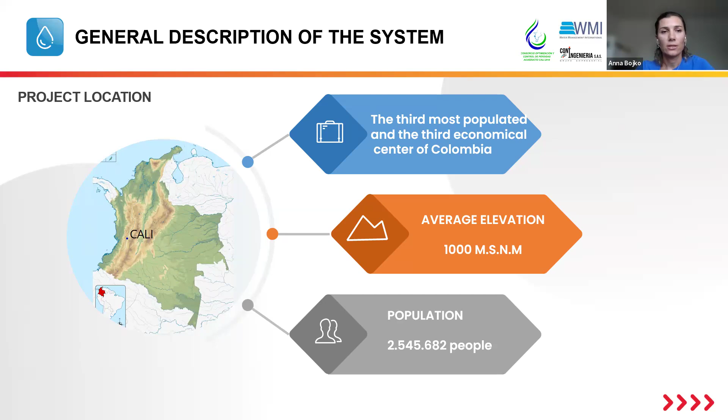The water supply system, as you can imagine for such a big city, is very extensive and very big. You can see here some facts and numbers about the system. It's a little bit more than 3,000 kilometers of network, and it covers 98% of the population of the city of Cali. The main source of water here is from rivers, mainly the river Cauca.

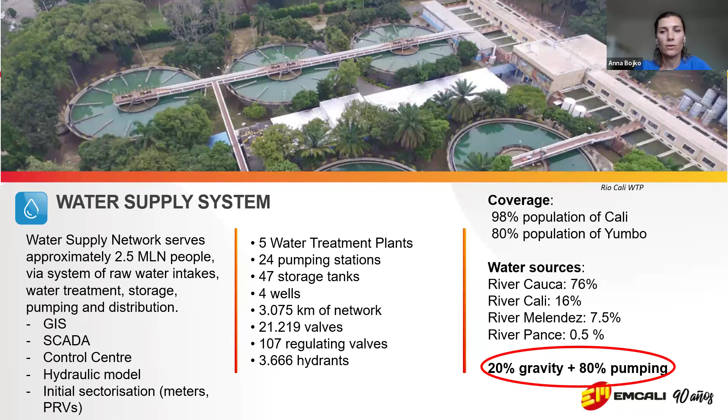What is very important on this slide is that, as the system is quite flat, 80% of it is supplied by direct pumping. This is very important to note when we are talking about physical losses, because when the majority of the system relies on pumping, the losses are quite high initially already.

Just to give you an idea of the utility, they are quite well organized and advanced. They have a good GIS database and SCADA system, and a quite modern, big control center. They do have a hydraulic model, which is updated from time to time but working quite well, and they have already performed initial sectorization.

Just to give you a little background, around 2010 Cali did a very extensive, big project on the initial sectorization of the city. The sectors were defined after extensive study, and some construction works were done to implement this sectorization.

The sectors were delimited, meter chambers installed. But what I always say is that sectorization should be done in several phases, because it's very difficult to do everything at once and right. It requires a lot of time and a lot of money.

So usually what happens is there's an initial phase of sectorization where all data is collected, which is usually not sufficient or very extensive. Then the first study, the initial sectorization, is done and implemented in the field. During this implementation, zero pressure tests, valve tests, and initial measurements reveal a lot of surprises for the utility. So they realize a lot of things and update the GIS database.

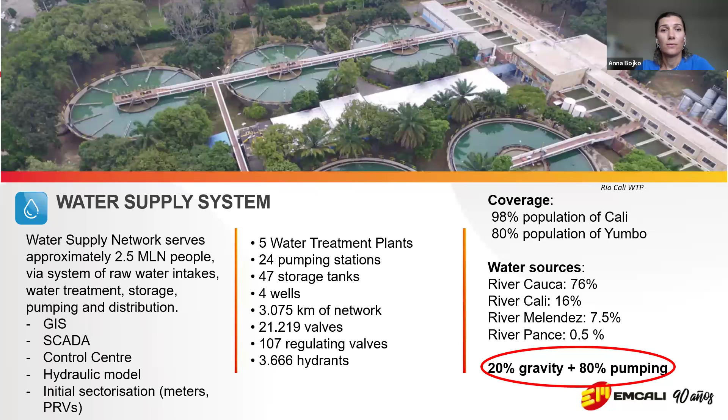So basically, this project was the second phase of sectorization for Cali. There was already some initial sectorization done, but most of the sectors didn't work when we came, and our job was actually to make them work.

So talking about physical water losses before the project, there was a constant trend of increased losses in the utility. Up to 2015, looking at the NRW index in percentage, there was a constant increase rate of more than 2 points per year, which was very, very alarming.

So in 2015, the utility started to feel an urge for some actions. They performed studies and identified various issues at this point, back before the project. They identified that they didn't have any integrated plan for managing losses. The organizational structure was inadequate - there was no unit dedicated to losses, and general low motivation among staff. There were also no widely accepted tools or data to estimate losses, and most of the sectorization was not working, as I mentioned.

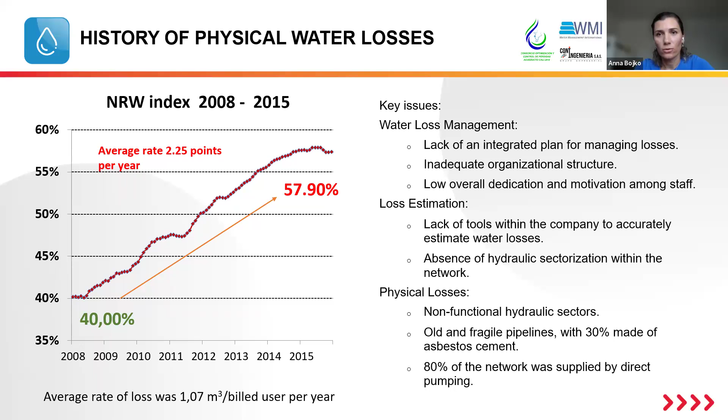Of course, there was also a problem of fragile pipes, with 30% of the network made of asbestos cement, and direct pumping without pressure control at most points.

At that point, the utility was inside this vicious cycle. They were obliged to supply minimum pressure to customers, so they would pump water to comply with this pressure, but that would produce leaks, and leaks would decrease the available pressure. So they would increase the pumping head again to comply with the minimum pressure, and this increased pumping pressure would produce even more leaks. It was a cycle we were trying to get out of.

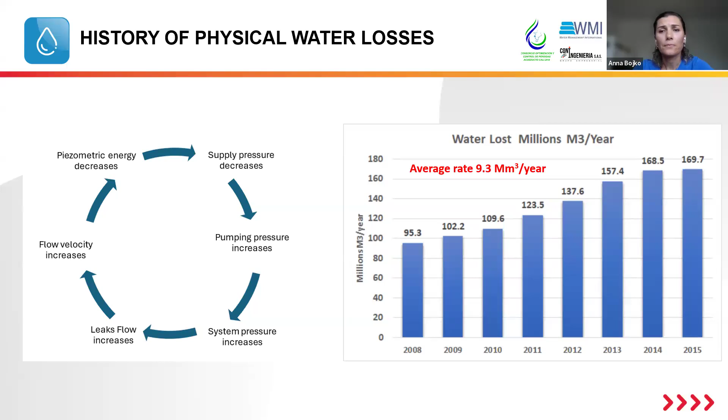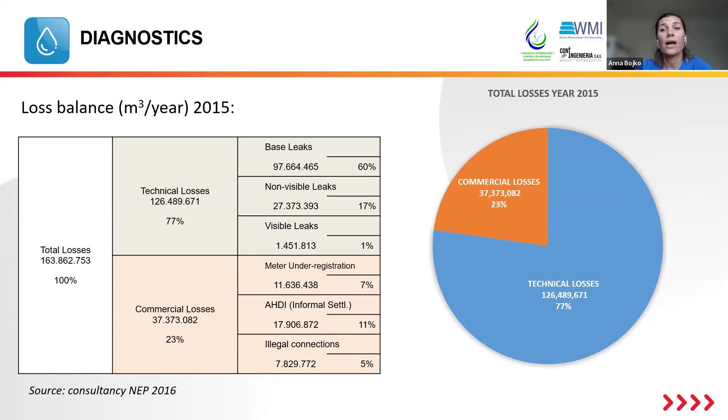In 2016, a very extensive study was performed on the water balance and identification of different sources of non-revenue water. It was found that technical losses contributed 77% of the non-revenue water, while commercial losses were less. This ratio was updated after the project - it's a new study - but the main thing stays that technical losses are very high and a major part of non-revenue water.

In Colombia, there exists an organization called CRA, the Commission for Regulation of Potable Water and Sewer in Colombia. This national Colombian regulator set a target in 2015 that utilities need to achieve 16.3, what's called IPUF, a loss index in cubic meters per billed user per month, by 2021. In Spanish, IPUF is índice de pérdidas por usuario facturado.

This is a national measure of non-revenue water that was actually part of the project. Just to give you a sense in more international units: in 2015, Cali had 788 liters per day per active connection in losses, and the target was to achieve 536 liters per day per active connection by 2021. That's just as a reference.

So that was a target set by the regulator, and Cali had to do something to achieve it. So in 2015, they developed a water loss recovery plan - a very extensive plan covering all areas of water supply. They identified projects and could estimate how much recovery they could expect from addressing different problems.

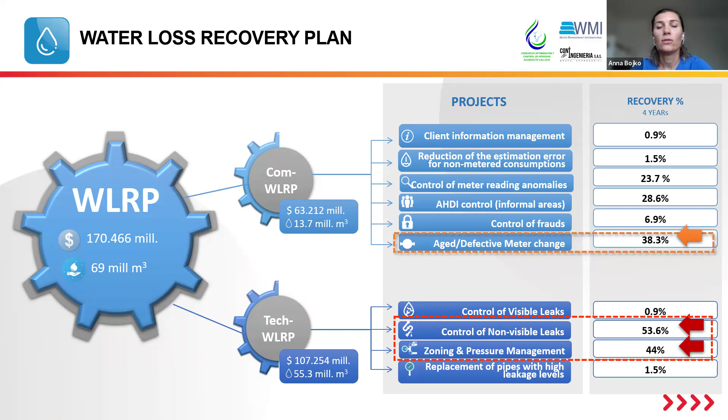As you can see here at the bottom, when we talk about technical or physical losses, the majority of the recovery would come from control of non-visible leaks and zoning pressure management. So actually, this project was designed to address those two issues.

So in 2019, through an international tendering process, Cali contracted a consortium of Water Management International and Ingeniería to implement design and construction works for pressure optimization, sectorization, and non-visible leak control for the city of Cali. Now I will present the details of the project itself and some technical parts.

In the project there were three main flows of work implemented simultaneously in parallel. The first was hydraulic sector optimization and pressure control - sectorization and pressure control across 50 sectors, which is more than half of the city network. This included investigation, DMA tests, measurements, modeling of all sectors, calibration, choosing the optimal alternative for water loss reduction, and finalizing design and construction works.

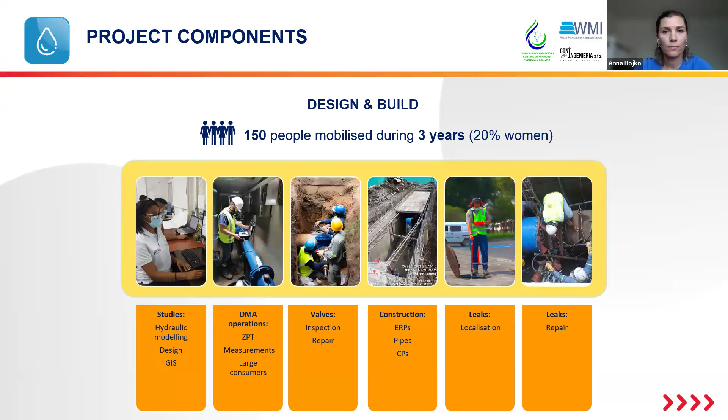We have changed and repaired 2,500 valves, 3 kilometers of pipes, and the client, the utility, asked us to install 4 different active pressure control technologies to do some benchmarking among them. We found that the most challenging part was incorporating some of these technologies into SCADA - this was the most challenging part of the control project.

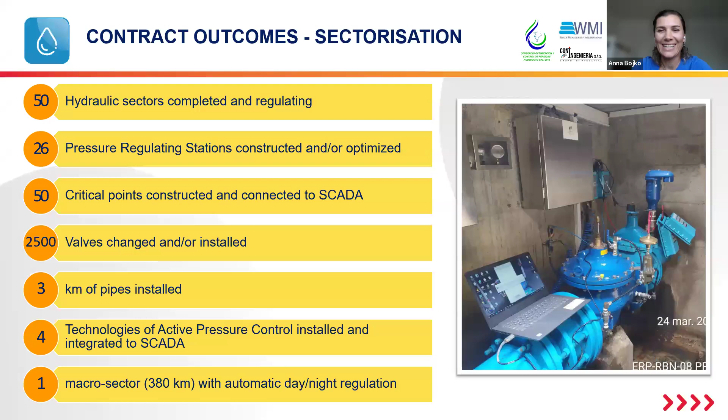Here you can see a very beautiful picture of a very nice pressure and measurement station at the entrance to one of the sectors - very aesthetic, in my opinion. Just to give you an idea about the works we did as part of sectorization and pressure control: construction works, regulation, repair, SCADA, design, and studies.

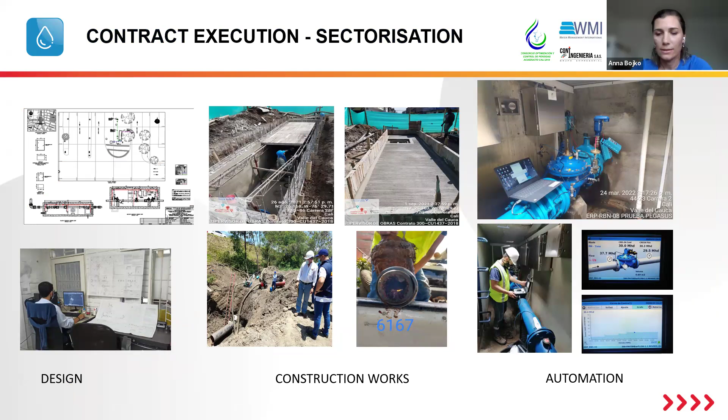We have performed acoustic leak detection and found and repaired 5,300 leaks on the 4,680 kilometers of the network. So basically the entire network below 300 millimeters was worked twice. What's important, and I think it's a very important indicator, is that 95% of leaks were found on the service connection, including saddle. Plus to this, we repaired 35 leaks on large diameters of pipe more than 400 millimeters.

On the next slide, I can show you some of the repairs, some of the leaks that we worked with. You can see big works. Saved a lot of water by repairing those.

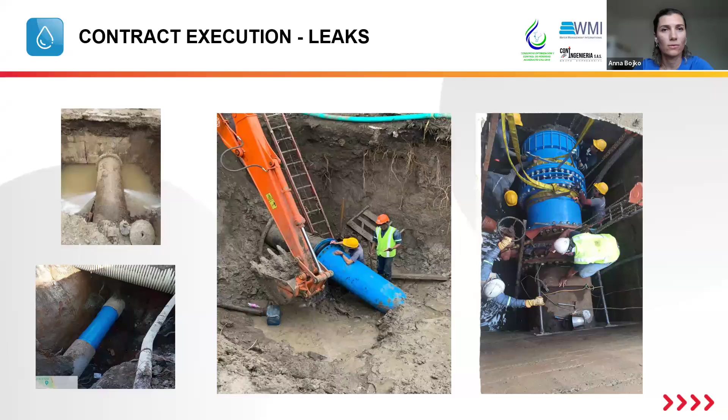Now coming to the results of the contract, as well as the results we estimated for each activity we did. So that's why we could tell some of the distribution of the water saving by activity. We did the bottom-up analysis before and after leak repair, and we have compared final contract and baseline estimates. So you can see here

So basically we have been certified by the utility for saving in production 67,000 meters cubed per day. That was certified with measured minimum night flow. I'll show you the certificate in a while.

We have found that 25% of this night flow reduction was actually thanks to pressure optimization, and 75% was to leak repair. So here you can see that both activities are very effective, but of course leak repair is very effective on reduction of water losses.

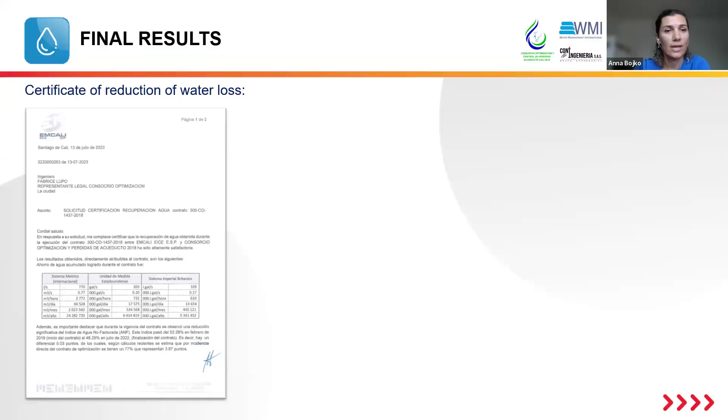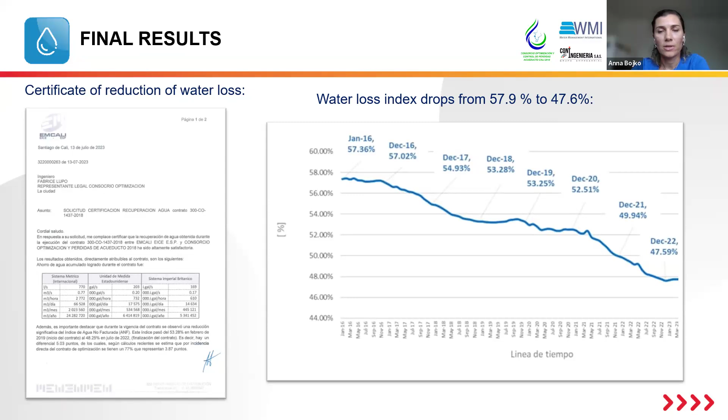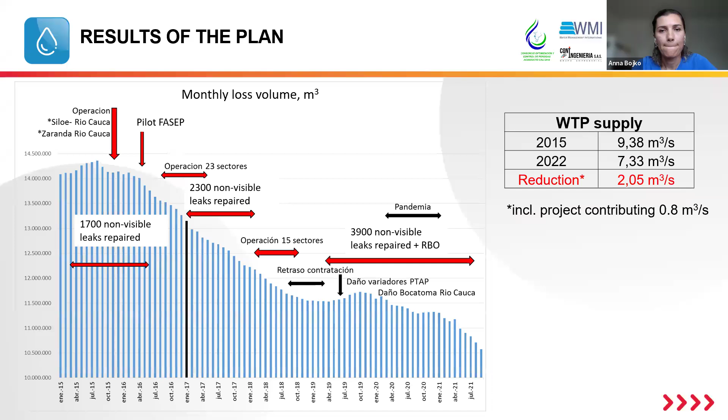So they managed to reduce, to put into international units, 344 liters per day per active connection.

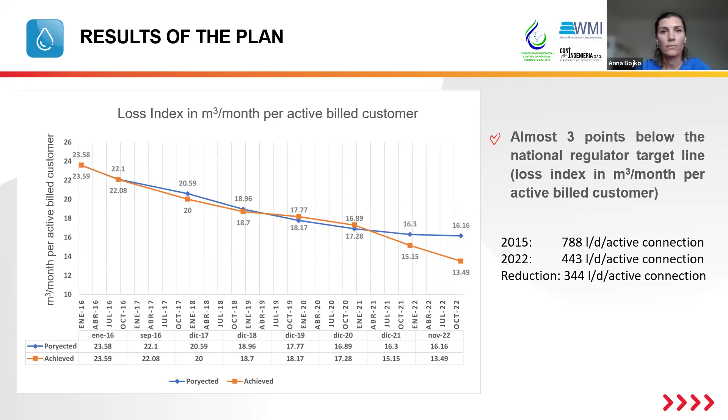And just to give an idea how much water was saved in the project, it's equivalent to 20 Olympic-sized swimming pools per day, or a medium water treatment plant, which would be enough for consumption of 300,000 people. So we are talking about a very good reduction in water loss.

That would actually prevent construction of a new treatment plant as a capex expense.

Here we have calculated a cost-benefit analysis of the contract. For the cost, the contract value was $11.2 million, and we intervened into 2,400 kilometers of network, which gives a cost of $4,500 per kilometer.

Calculating the benefit of water saved, we are talking about 53.3 meters cubed per day per kilometer. If we apply the marginal cost of production of water, $0.35 per meter cube, and convert it into length of the network, saying that we have saved this water over a 1.5 year period, it gives us a benefit of $10,200 per kilometer, which in turn gives us a benefit-cost ratio of 2.27, which is really great.

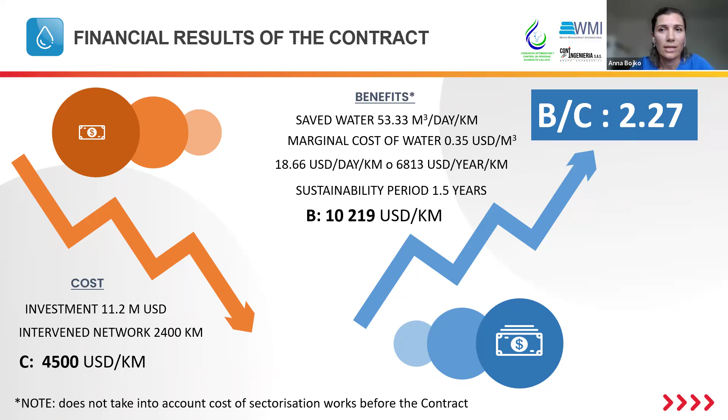Now I would like to spend a little bit of time on this slide and explain a bit more the factors that we believe contribute to the success of the project, because I think it's important. There are a lot of projects for water loss reduction and non-revenue water, and it's very difficult to actually reduce water and measure the reduction of water losses as a result of the project. But here it was quite clear, and there were several factors that contributed to it.

I am a very strong supporter of pilots, always, everywhere pilots, because it just saves a lot of time and money for the project. So here in 2015, Water Management International did a pilot study. It's a mini project, the same, but on 2 sectors. It was financed by the French Development Agency. All those activities were performed on 2 sectors, and they showed results, reduction of losses, which actually allowed Cali, the utility, to estimate and construct a contract, estimating the effort, problems, money, and timeline needed for the bigger project.

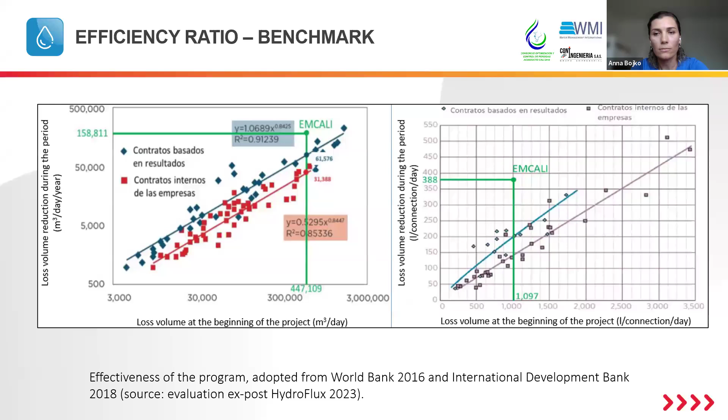So I would like to thank you all for listening to this presentation. I would like to say a special thank you to EMCALI. And actually on the last conference in San Sebastian Water Loss Conference, we presented together with the father of this project, Luis Eduardo from EMCALI. So it was nice to have a utility with us presenting. I would thank the project team, as well as Michel Vermes, who actually was consulted on the consumption of this project, and we utilized his material for the contract before the contract.

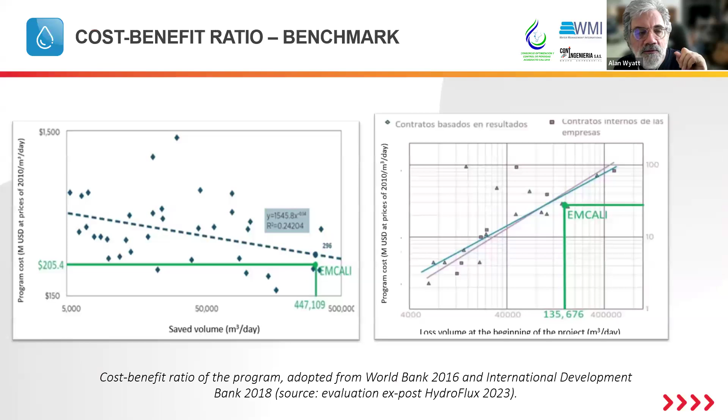Exactly, so twice. We did it twice. So you can see here 75. No, sorry, back. Here, yeah. So basically the entire network was inspected twice. Yeah, and what was the difference in time? Every 2 years, a year? How far apart in time were they? I think it was one run completed and then they restarted. So it would be, yeah, one run and then away. Half a year, a 1.5 year program. Yeah, thank you, that's great.

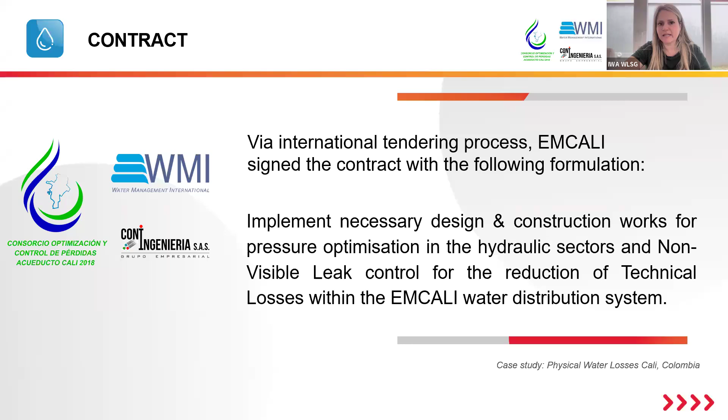Another question here from Alan Wyatt. Your indicator is cubic meters per month per billed user, but you also mentioned loss per active connection. These terms get misunderstood often because of terms in different languages. So I ask, were there more billed users than connections?

No, it was per connection. Yeah, okay, so alright.

This is very important because in the IWA indicators group, we have people who use cuentas, customers, branchement or tomas - all these different words are misunderstood. But a connection is very different than a user. In Brazil, you have 25% more users than connections, so it's very important to have that clear. Depending on the area, it can be up to twice the number of connections.

That's correct, yeah. So you were talking about connections in your indicator, is that correct, Anna? Yes, and it needs to be very clear - we can go back to the regulator's papers for exactly what it says, but basically it's dividing, taking from the commercial database all the active connections, and dividing those water losses by that number. So it gets intertwined with commercial losses as well, a bit.

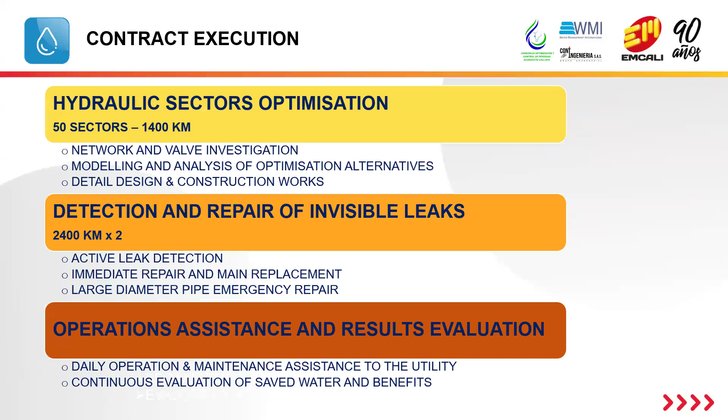To find them, we have used acoustic detection, and here you can see the photo of one of the field works.

Thank you, okay, thank you Cesar. Another one here, Jaime Plazas Tato.

I really enjoyed the presentation, it was very insightful, especially considering the challenges with water loss in Colombia's biggest cities. I wanted to ask if there are any other projects planned. Water loss in distribution networks is still a major issue in urban areas, and I'd be interested in knowing more if there are upcoming initiatives. Thanks again for all the information you shared.

So do you know about upcoming projects? Well, in Cali for sure they're planning projects, because these kinds of things need to be done on a constant basis - non-visible leaks and visible leaks as well. Most utilities in Colombia would not have enough staff always to deal with all of that. The project was to assist the utility - we did it for 3.5 years, but it needs to continue. And some more programs addressing commercial losses as well. I'm sure Cali is planning further large-scale projects, and other utilities too, because in general in Colombia the water losses are quite high.

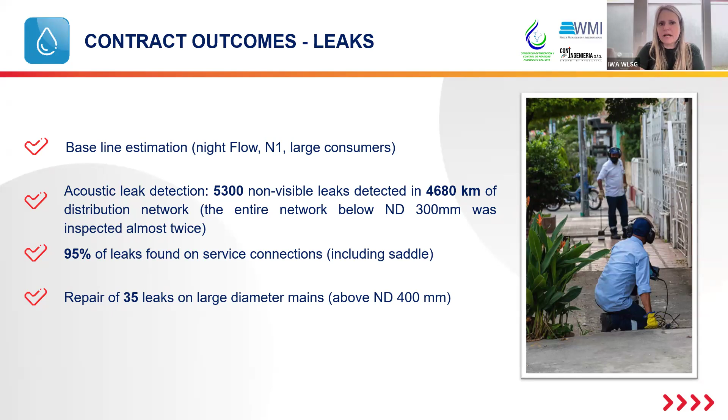Are the targets by CRA available to the public, perhaps on the CRA website? Are they available? Yeah, it was. If you Google it, you will probably get it.

Maybe it's updated because the target was for 2021, so I guess they have already updated the version of the documents and the target, but for sure it's all publicly available and can be searched on the internet. Here you can see actually on the graph, CRA 688 from 2014, so I'm sure there is another similar legislation or regulator document now.

That's perfect. We do have some more people talking, but it's just between themselves. And I think we are right on time, Anna - perfect timing. We always have, with me, perfect timing.